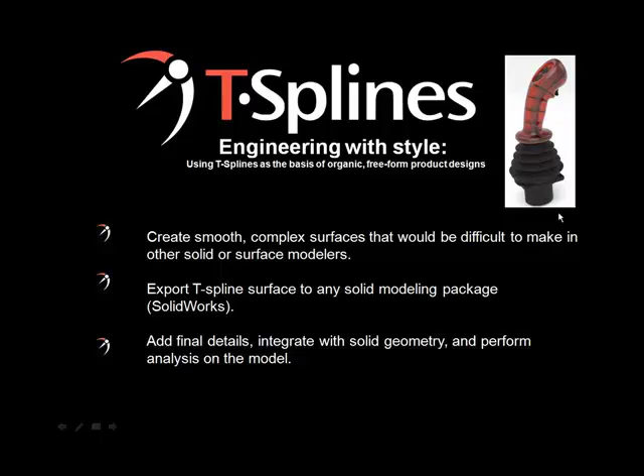Before we begin the demo, I'll review a brief overview PowerPoint of what T-Splines are and why they are useful in the design and engineering process. So T-Splines is a new surface and also a plugin for Rhino that allows you to create smooth organic designs, edit them quickly, and export them for manufacturing without remodeling.

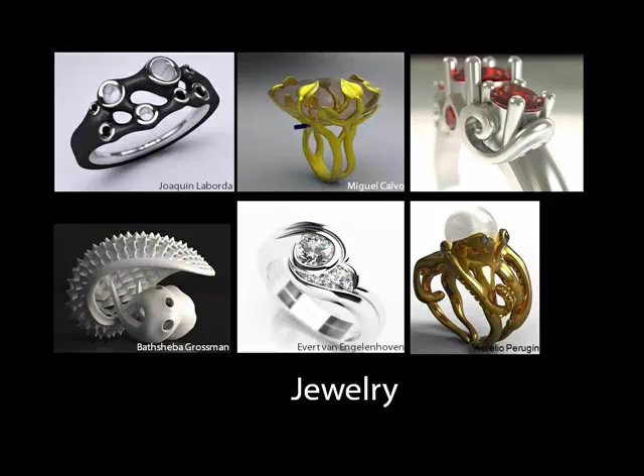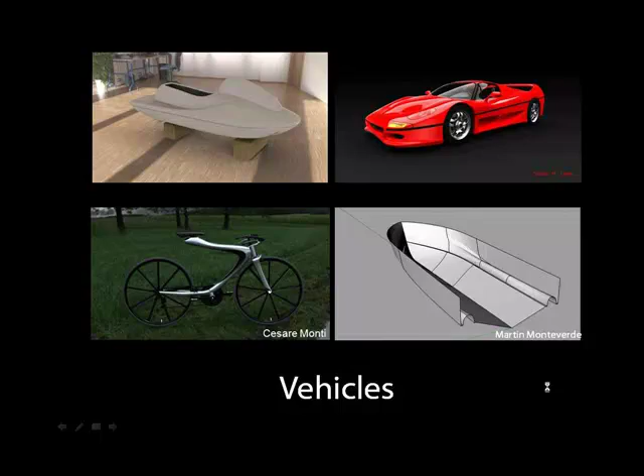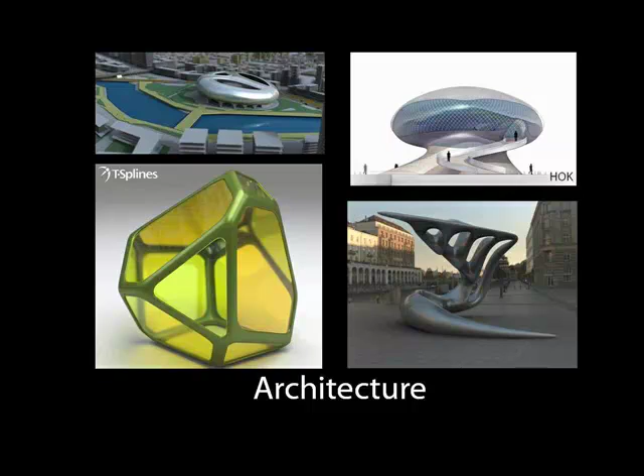Now, the reason why T-Splines was used for all these designs is because T-Splines offer some advantages to the technology currently used throughout CAD, which is called NURBS, or non-uniform rational B-splines. Just as a background, NURBS all have a rectangular topology. They're a smooth surface, but when you need to make a more complex shape out of NURBS, then you need to use a number of NURBS patches to comprise the model. That's possible, but it makes it difficult to have the patches all meet up in a watertight manner. And when you do get NURBS to be watertight, the models can be difficult to edit without losing smoothness, increasing model complexity, or even without gaps appearing.

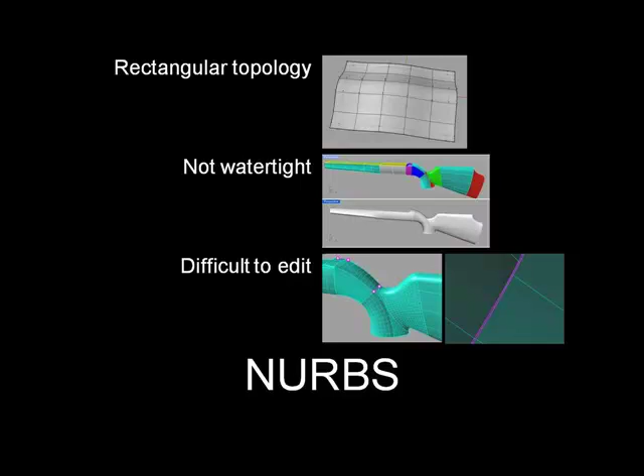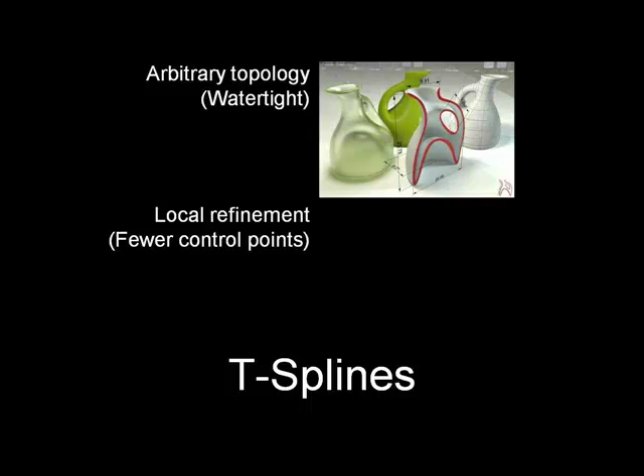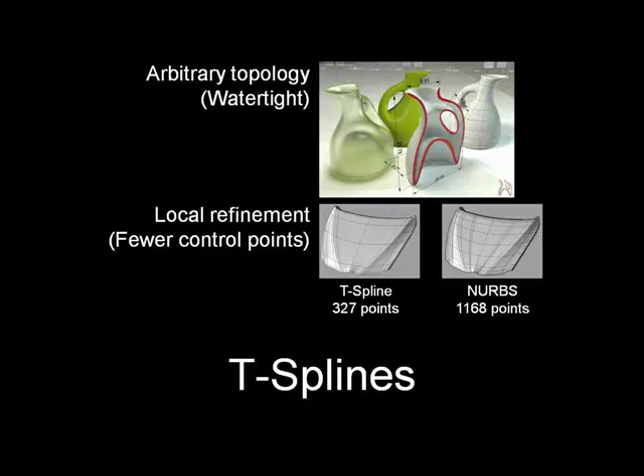So T-Splines are a new surface type that was invented to solve these shortcomings in NURBS. T-Splines are a smooth surface, they're compatible with NURBS, but they have 2 key differences. First, with T-Splines you can have arbitrary topology in your model and keep it watertight. What this means is that you can have voids, holes, Y branches in your model, and it can still be one single smooth editable surface. Second, with T-Splines, you can have local refinement in your model, which means you can have detail just where you need it without having the detail propagate across the whole model, which makes the model easier to control and also to fair.

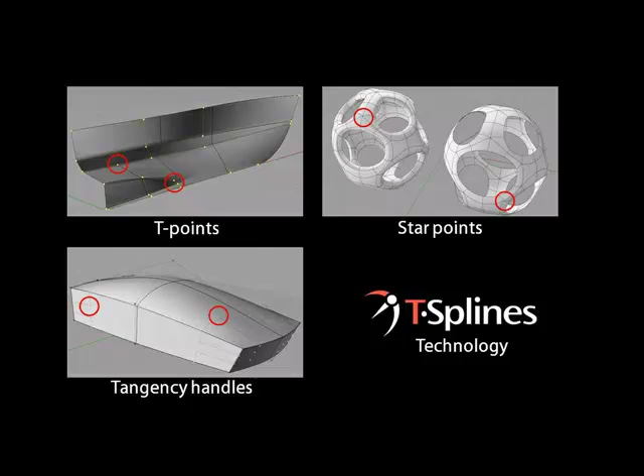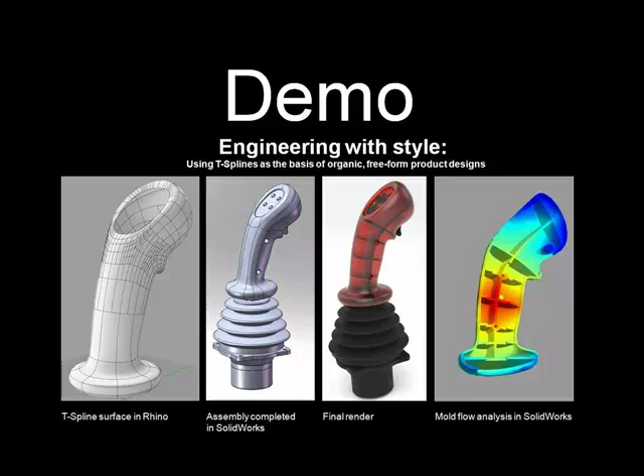So with that brief overview of what T-Splines are, let's step into the demo, which will comprise the rest of the webinar. During the demo, we will show how to create a T-Spline surface in Rhino for this joystick, then how to complete the assembly by adding additional details inside of SolidWorks. We will also show that this model can be subjected to any type of analysis done in SolidWorks, and it will hold up as a good surface.

So let's switch over to Rhino. Here you will see this is just a copy of Rhino 4, and the T-Splines plugin is these pink icons in the T-Splines toolbar. T-Splines is a fully integrated plugin inside of Rhino, and many Rhino commands can be used on T-Spline surfaces, and it's very well integrated.

During this demo, we'll show two ways that a T-Spline surface can be created to make both the base and the handle of this joystick. We'll also show how to merge T-Spline surfaces together and how to use T-Spline Symmetry to explore the shape of the model.

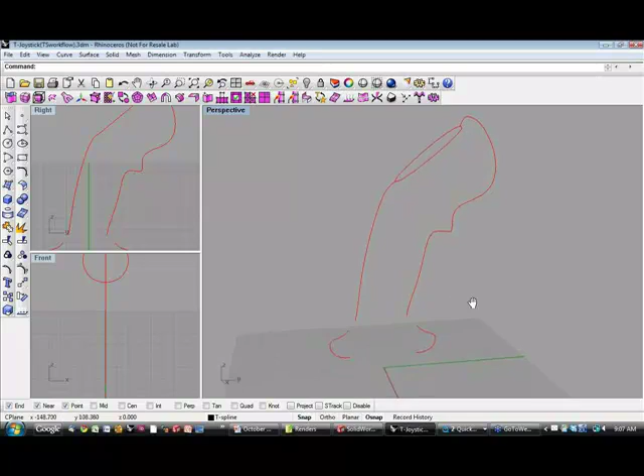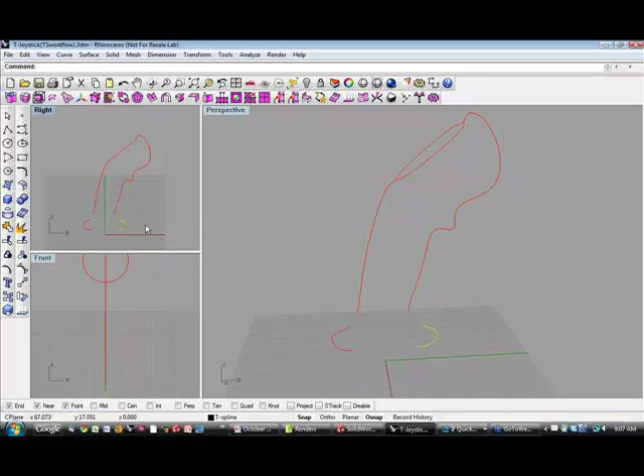So to create this joystick base, we'll just pick one of these curves and use the Rhino revolve command. We'll open the surface menu and click revolve, then revolve this around the origin. Let's look at snapping to that, and just step through the revolve command.

Now we've made a NURBS surface, and later we will convert this to a T-spline, but that's how we'll get the base of our joystick.

Now to create the top of this joystick, we're going to use a method called box modeling, which is a method you can use in T-splines. You start with a primitive, and then you push and pull on that primitive until it arrives at the shape of your design.

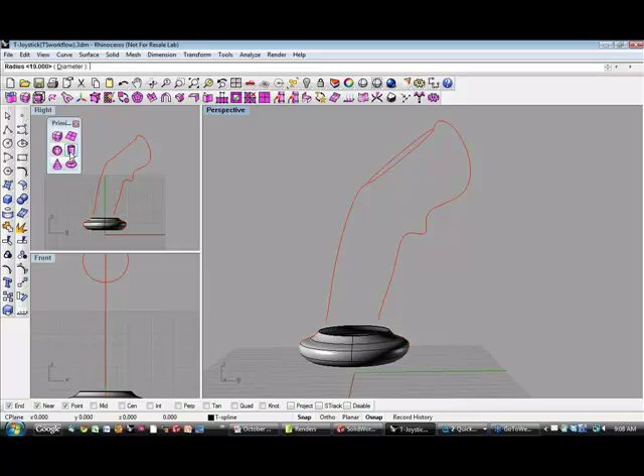So we have some T-splines primitives here, and we can just choose the primitive that most closely approximates our final shape. In this instance, I'll use a cylinder with a radius of 19, and I'll place the end of the cylinder here.

Then just move the cylinder up into position so that it lies where it should in the model.

So now we have the two basic components of our model created, and we just need to make a few more modifications before we continue on with our modeling.

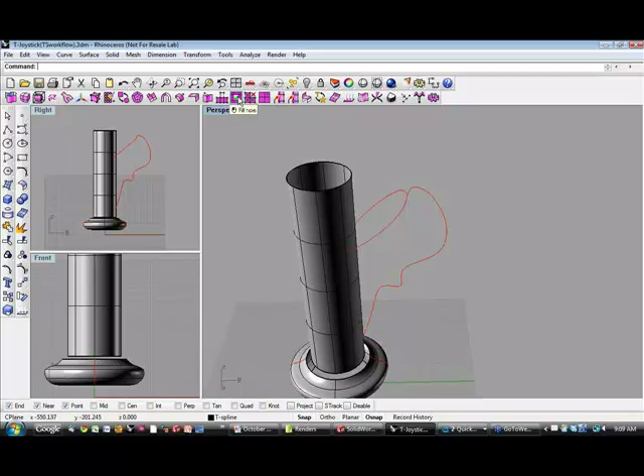First of all, the top of this joystick will be closed, and we have an open top to our cylinder. So what we need to do is fill that hole, and we can do that using the T-Splines fill hole command. Just select an edge of the cylinder, and it will close that hole.

You can see what this has done is created a smooth surface, but on the very top of this is an 8-sided face. T-Splines allows n-sided faces in the model.

However, if I zoom in on here, you can see that n-sided faces are not always the smoothest.

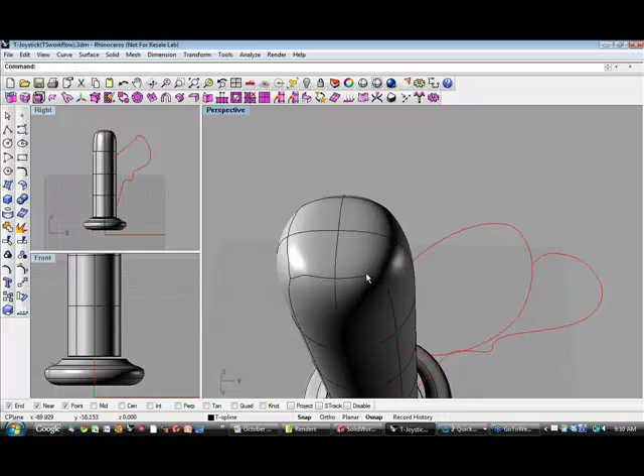So we'll go ahead and divide this into some 4-sided faces using the T-Splines insert point command. This is just adding edges to the model and dividing that 8-sided face into 4-sided faces, so that's cleaner geometry to work with.

You can see there's even some artifacts of the n-sided face there. To remove those, I'll use a command called the make uniform command, and that will relax the surface and make it smoother and easier to use as I'm modeling.

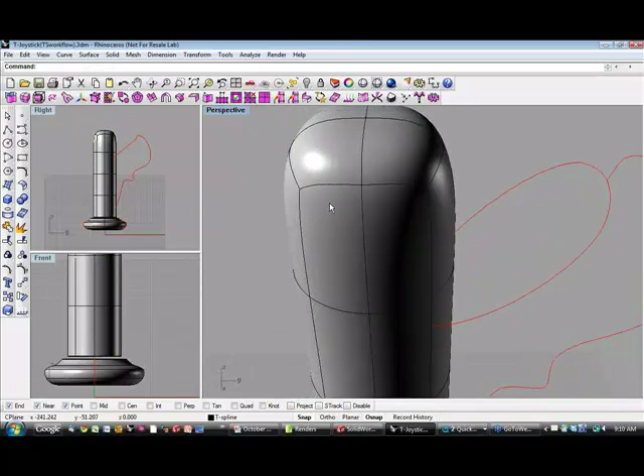So now we've gone ahead and capped off the top of our cylinder and made it nice and smooth. Now we'll go ahead and merge the T-spline surface to the NURBS surface.

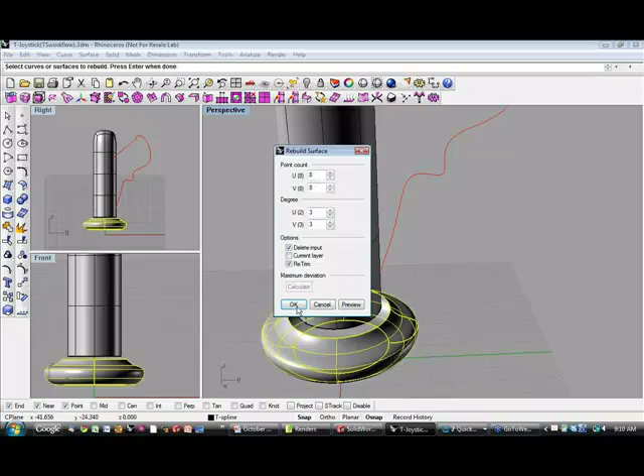To perform the merge, first we need to convert the NURBS to T-splines. Before we do that, I'll rebuild this NURBS surface to make sure that it's degree 3 by 3, and I'll also make sure the point count stays 8 by 8 so that the isoparms line up with the T-spline surface. It's not necessary to have the isoparms line up together, but it does create a cleaner model.

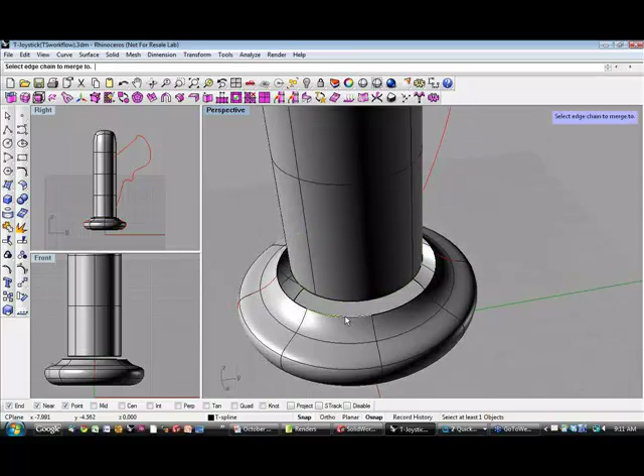Now I'll use the TSplines merge command and merge from the T-Spline cylinder to the base. You can see that's created a nice smooth surface there, so now this is a single T-Spline surface.

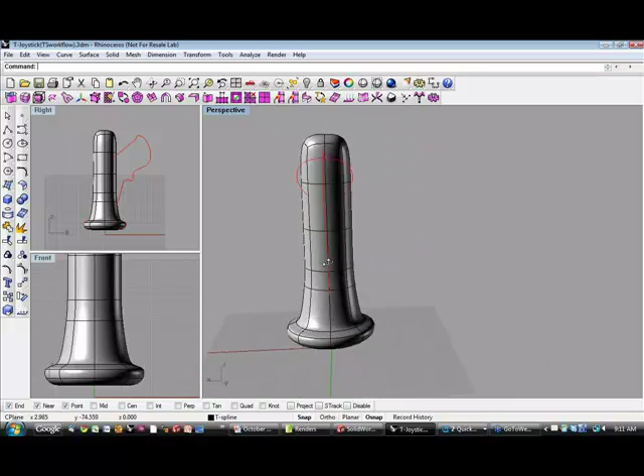The final thing I'll do before we start moving control points to get the shape of the joystick is take advantage of the T-Spline symmetry. Since our joystick will be symmetric, I'll select half of the T-Splines model. I'll enter T-Splines edit mode, turn on face mode, select the T-Spline faces on the side of the model, and just hit the delete key, which will delete half of the T-Splines model.

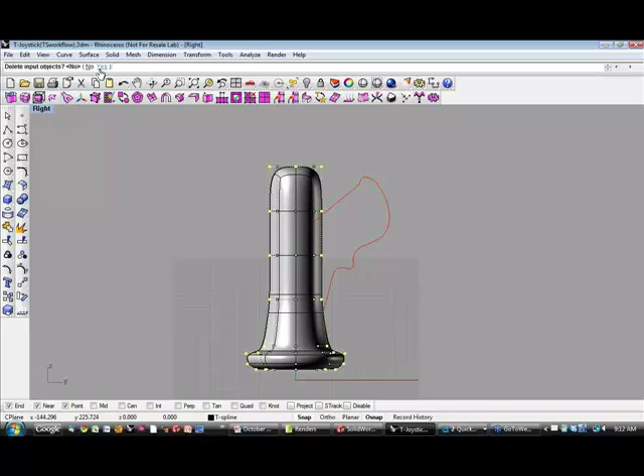To apply symmetry, I need to make sure all my control points lie along the center plane. First I'll use a Rhino command to project all those points to the C-plane. Now that they're lying along there, I can use the T-Splines symmetry command to apply symmetry to the model. We can apply it in various directions, even radial symmetry. In this instance we'll just do X symmetry, apply that, and this green line means I now have symmetry in my model.

So when I select a control point on one side of that line, you can see it will update on the other side.

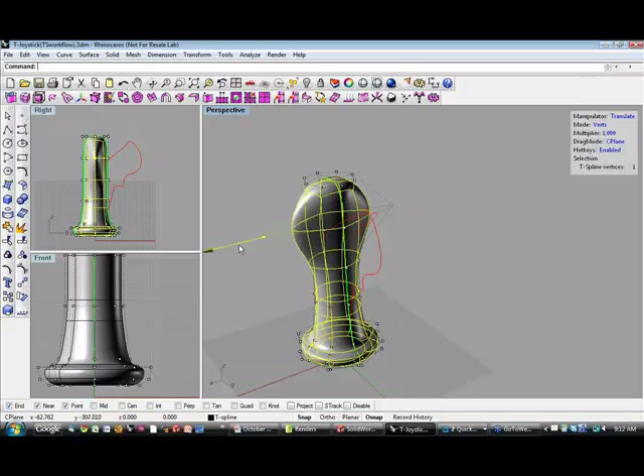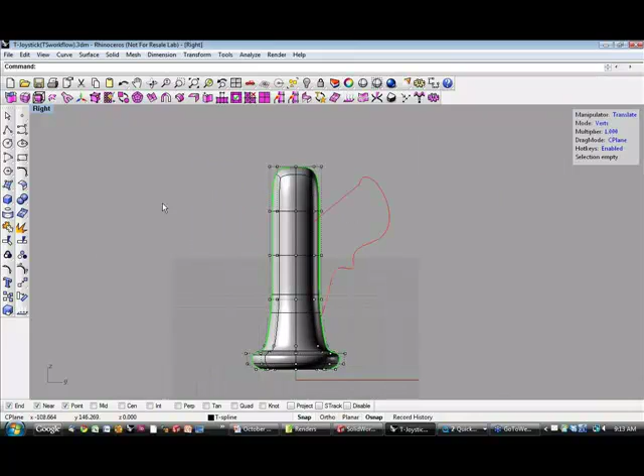Now that we have this basic T-Splines form, we'll move the control points to get the curvature of our joystick. Let's go to the right view, and first let me turn on my layers and lock the reference curves so I won't be selecting them. I'll also go to the wireframe viewport and use the T-Splines manipulator to move the control points.

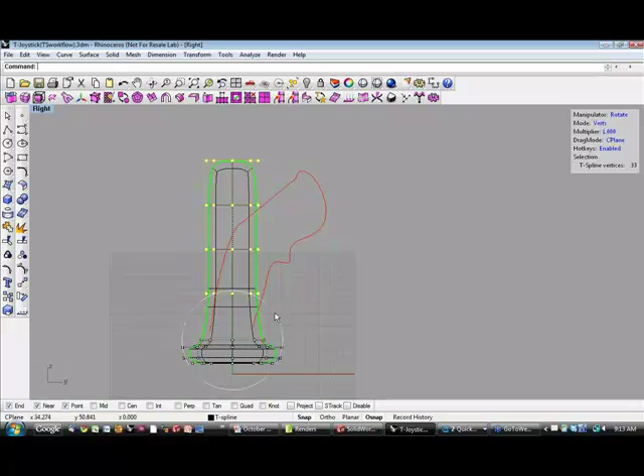Here we have the translate manipulator I've been using. I'll switch that to the rotate manipulator, press a hotkey to set the pivot point down at the base of the model, and just rotate all the control points. I'll deselect this row, again change the pivot point down here, and continue this process to get some basic bend.

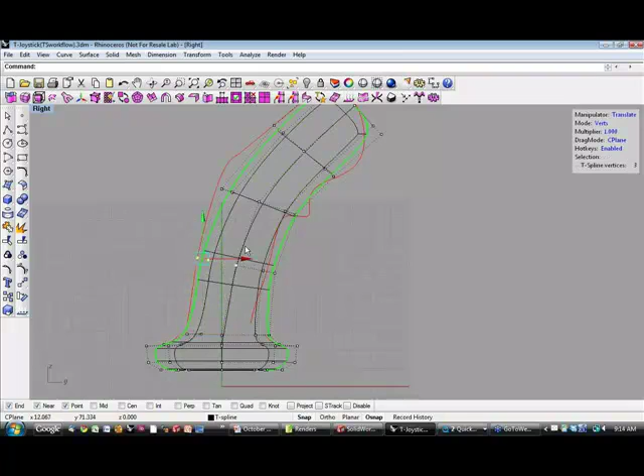Now that I have this model basically bent, I'll come in and move the control points some more to more closely match our reference curves. This is the key principle of box modeling: use a very small number of control points, but move them so that they can match a reference image or reference curves in the back of the scene.

So I'm just moving these control points around, and this is looking a little bit better now.

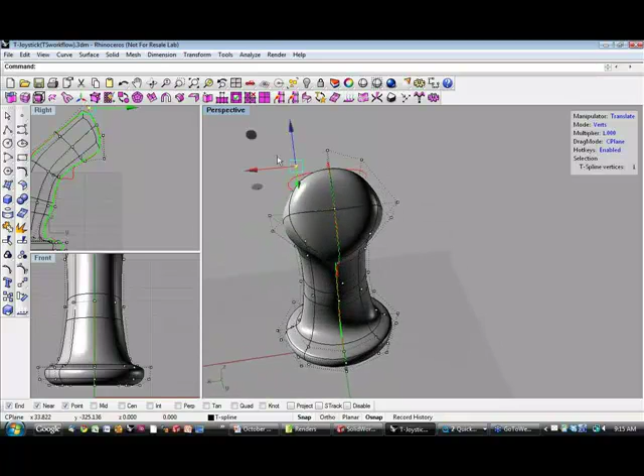Let me go into the perspective viewport. I've just been working in the orthogonal right viewport, but here in the perspective viewport I can also move some control points in these other directions. This box modeling gives you a nice flexible model that you can use for your form finding. So I'll move these control points around and see how that's looking.

One part of the model, right here for the trigger, will be difficult to have the surface flow through with the number of control points we have. So we have a couple options. First, we could add a lot of control points and then pull them out, but that gives us a needlessly high number, and then it will be difficult to smooth the model afterwards.

The second thing we can do is actually add some more faces by constructing them and putting them into the T-Spline surface. So that's what we'll do.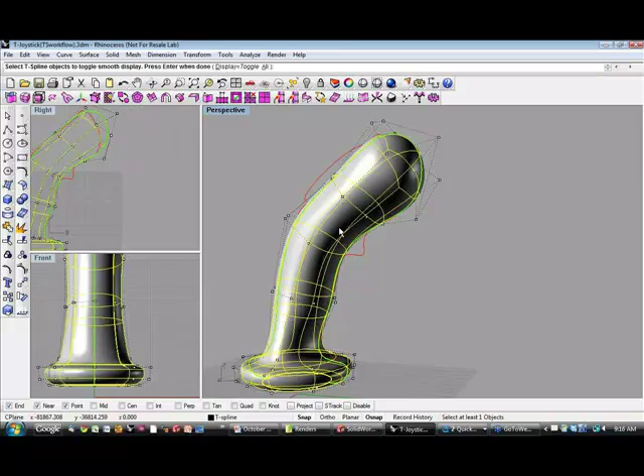Anytime I'm adding and deleting faces from the T-spline, I like to switch modes. This is what we call the smooth T-splines mode. We also have a mode we call box mode. You can click the smooth toggle icon and select the T-spline surface, and you can see how it's now represented as a boxy mesh. It's still the same model, and the control points are in the same locations between the smooth surface and the boxy mesh. This just gives me an easier way of understanding the topology of my model and where all the faces and edges are located.

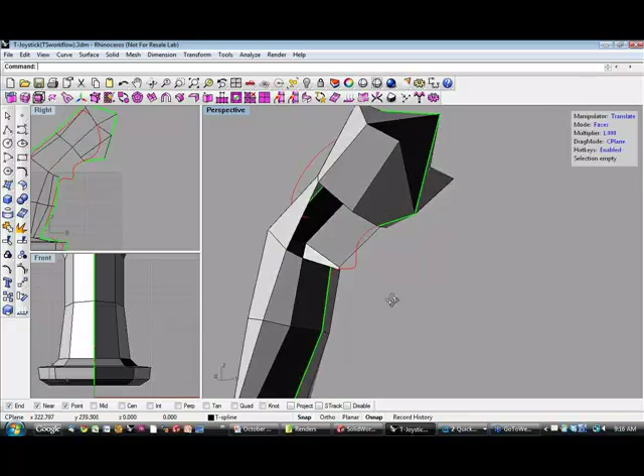So what I'll do to add some geometry here is first delete some faces. I'll go to face mode, select those faces, and just hit delete. You can see since I have symmetry on, it's deleted on both sides of the symmetry line.

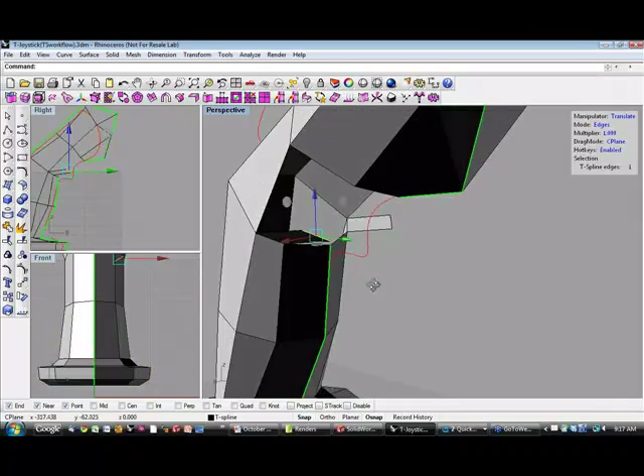Now I'll go to edge mode, select an edge here, and extrude that edge using the extrude command. You can see that adds geometry to my surface—it's added that face I've extruded. So I'll go to vertex mode and move these vertices around so that they come into the position where I want them.

And then I can go ahead and go to edge mode and extrude this edge again. Go to the extrude icon. You can see that it's being extruded since I have symmetry turned on. It's being extruded on the other side as well.

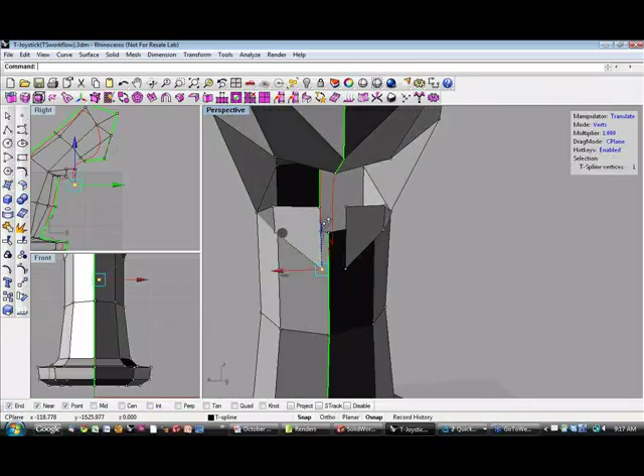Let's see, vertex mode, and pull this down to make the trigger a little bit bigger. Now I'll use the T-Splines weld command to weld these points together. Symmetry is still on. I've welded that together, so now I've added some geometry here, but I still have these gaping holes.

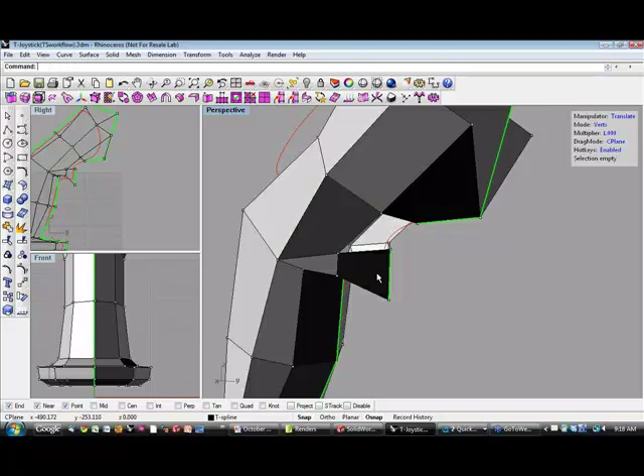We used the fill hole command before to fill in the surface, and I can use that here as well. Another command we have to fill holes is the append face command, so I'll use that this time. To use it, you just click on the corners of where you want the new face appended, then hit enter. So we'll do that again, clicking on corners of where you want the face to be. This gives you a little bit more control than the fill hole command as far as what your face looks like.

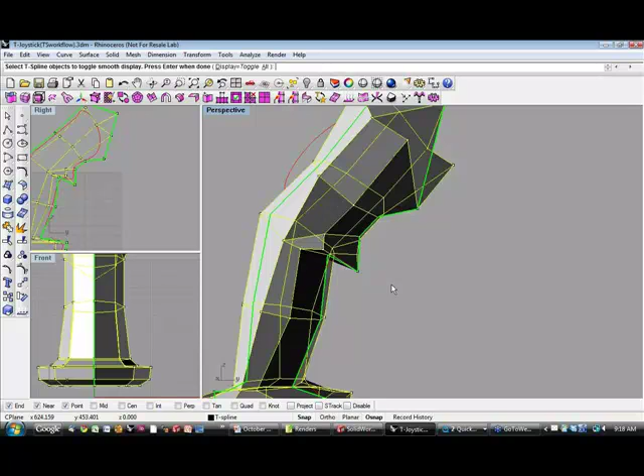Now that we've filled those in, I'll hit smooth toggle again and we'll see what the smooth surface looks like. Let me see if I can change that view a little better. We now have this star point here, and another star point here, which means we have some non-rectangular surfaces, which is nice because this is kind of a non-rectangular area here with the trigger.

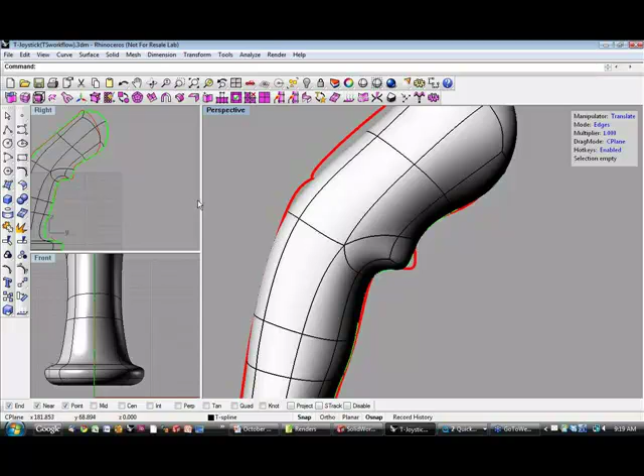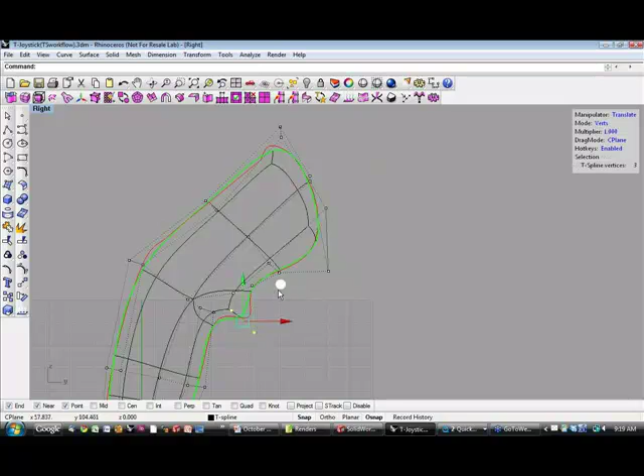I'll go back in my right viewport, turn on my vertices, and reposition the surface. It looks like I pulled this up higher, so I can bring that back down, and just reposition our surface so that it's matching what we had laid out with our sketch curves.

So now we have a trigger area. Let me turn back to shaded for our model.

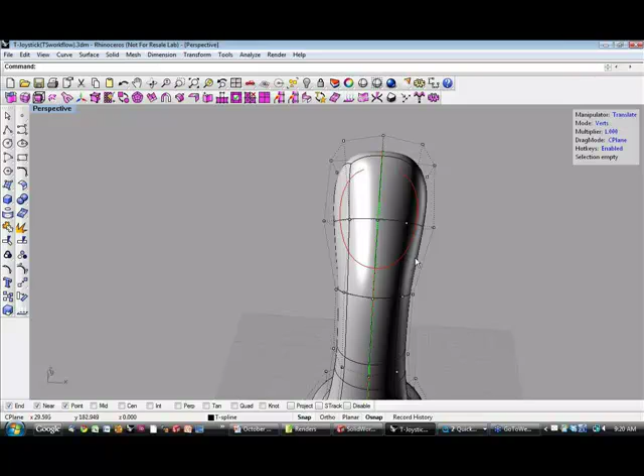We will add two more parts of detail before we bring this model into SolidWorks. First, we need a hole here in our model because this is where the plate will go on for the joystick. If you want a hole in T-Splines, you have two options. First, you can trim the T-Splines model using the Rhino trim command, and it will turn into a NURBS, but you'll get an exact trim. That's often a good approach, but then your model is no longer a T-Spline.

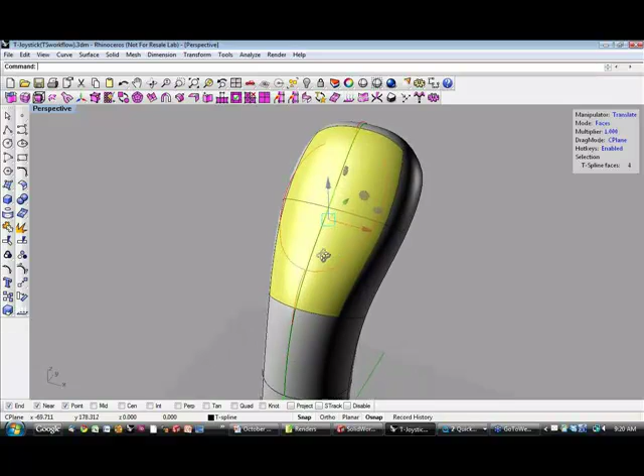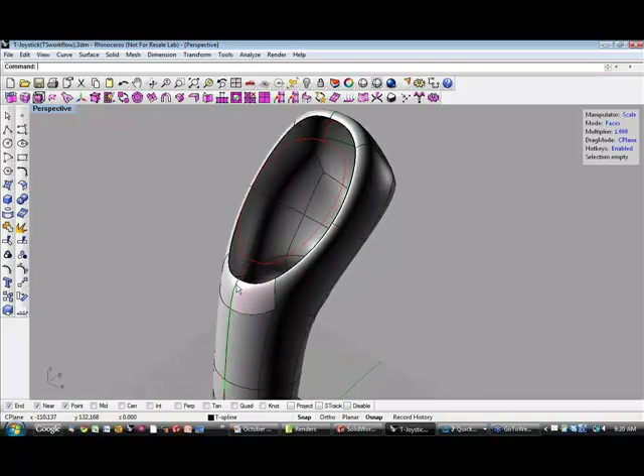The second thing you can do is just delete T-Splines faces, so that's what we'll do here. I'll go to face mode and select these faces. Before I delete them, I'll extrude the faces, just like we extruded edges before. This gives us additional faces in the model, and I'll scale them inwards to add a nicer ring to the edge of the deletion. Now I'll hit delete, so now we have a hole there in the T-Splines model. Again, the extrusion gave me a nice ring around the edge of that hole.

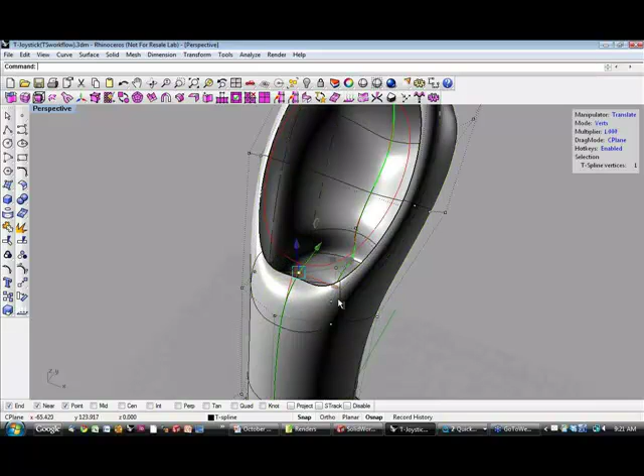Now I want to match the T-Spline surface as close as possible to this curve which I've laid out. We have a command in T-Splines to do that, called the match command, and it can match the edge of a T-Spline surface to any curve or NURBS surface edge. Before that match, I'm just going to pull the surface a little bit closer so that the match is less ambiguous how it should take place. Okay, so that's looking a little bit better.

At this point also, I'm going to turn on my layers and move ahead to another layer that I had prepared previously, because when we move this model into SolidWorks, I want to make sure that the different features are working in SolidWorks. But this is basically the same model that we've been working on today. And now with this edge close to that curve, I'll go ahead and use the T-Splines match surface command.

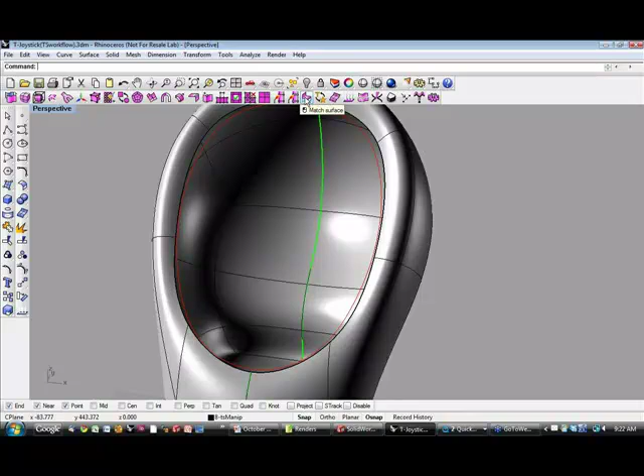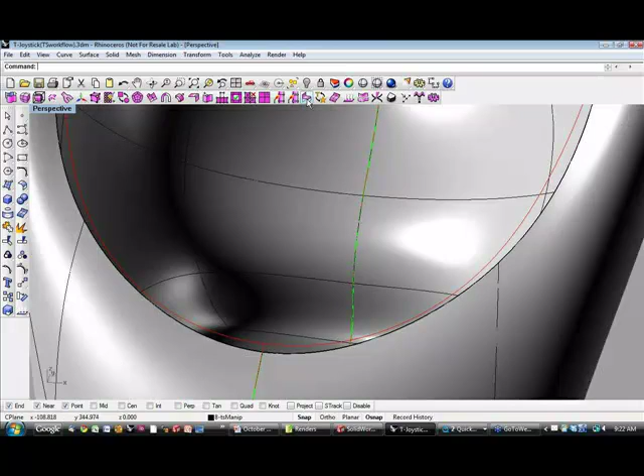So I can just double-click to select this T-Splines border edge, and then I'll select the edge that I want it to match to. And it looks like, actually, I better turn my layers back on and unlock those curves so I can select this curve. And then it looks like I better run the match command again. It gives me a little dot here, and I need to click opposite that dot on the curve so that it knows where the seam of the match should be.

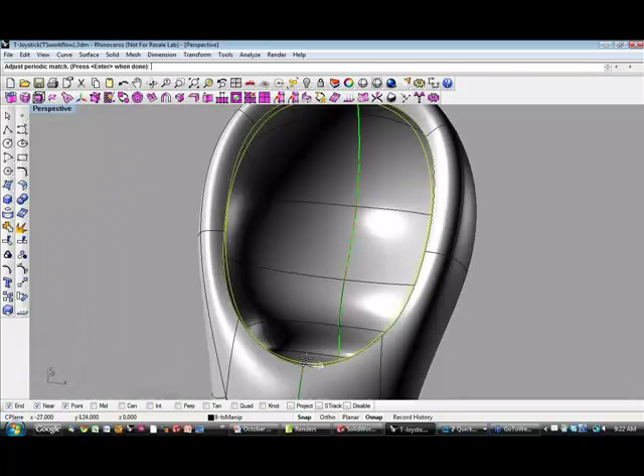And I can just move this seam so that it's in a good location, so that there won't be too much twisting. And then I'll just go ahead and hit enter. And I have an option to refine. If I do refine the surface, then it will add more control points, but it will get the T-spline to within file tolerance of that curve. So it will really match that curve nicely. The match command will disable symmetry.

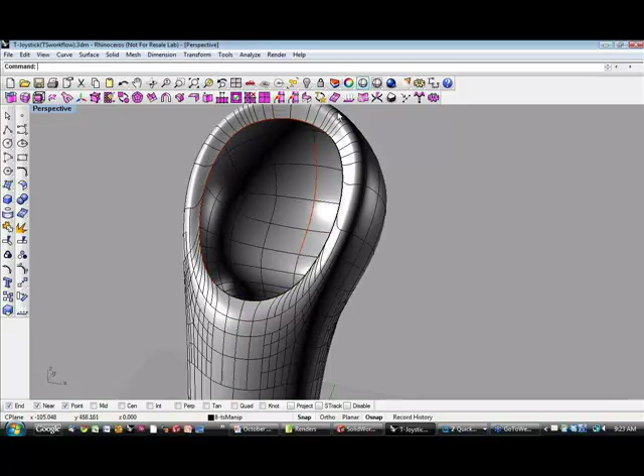But you can see now how closely that T-spline is matching that curve. It's within your file tolerance. So you can see it's added some more detail in order to do that match. But the nice thing with T-splines is that detail can be localized. And so down here on my model, I don't have any more detail needed because the detail will just be T'd off here.

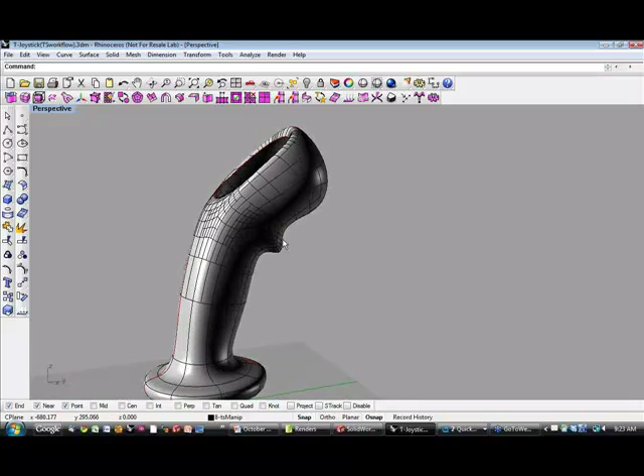The final feature that we'll add is a local T-splines crease. T-splines have the ability to have creases that only go partway through the model. So I've just selected this edge loop, and I'll deselect some of those edges. And then I'll just use the T-splines crease command. This will give me a perfectly sharp crease in my model. So we can zoom in and see how that's giving me a perfectly sharp crease.

The tangency of this crease can be controlled by these special T-splines tangency handles. You can tell that they're colored white. They're a different color than the other control points. And I can select those control points. I'll change my manipulator drag mode to UVN, so I can drag those perpendicular to the surface and change the tangency of the surface around those tangency handles.

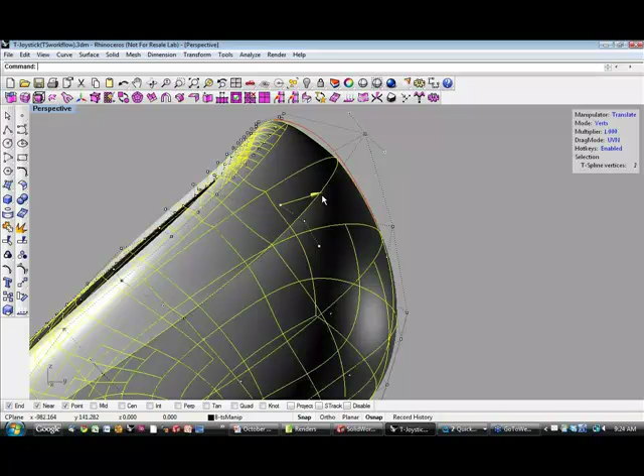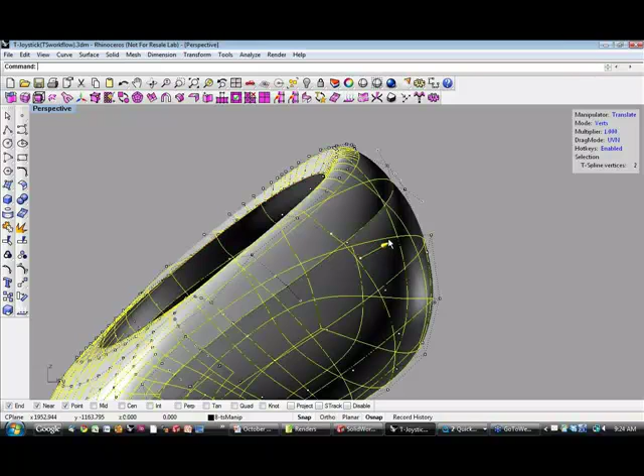So you can see before, the surface kind of peaked at the crease. Now the crease is kind of going into the surface. I'll do that on a few more of these. Let's see, make sure I have those selected. And I can just go around my surface and adjust the crease so that it's coming in with the tangency desired.

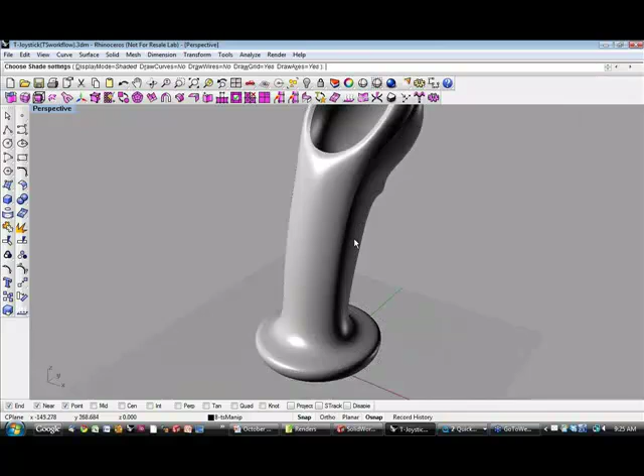Okay, so this is basically the model that I'm ready to bring to SolidWorks. And because SolidWorks does not have T-splines natively today, what I'll need to do is convert this to NURBS. But converting T-splines to NURBS is just a push-button operation. You can see here's the T-spline surface, and to convert it to NURBS, I'll just click that icon and click the T-spline. And you can see the actual shape of the surface doesn't change.

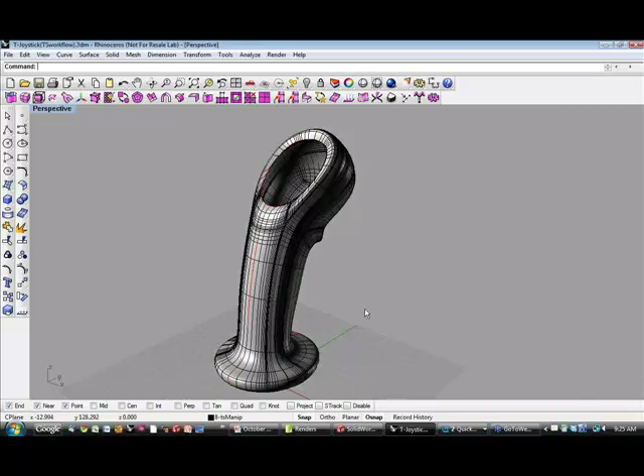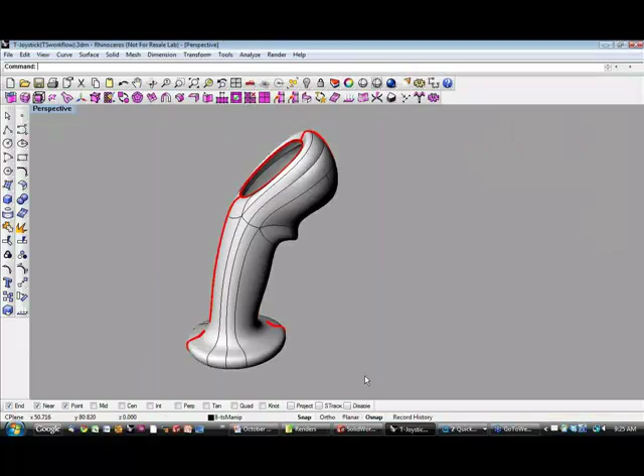What does change is that the T-spline needs to be split up into rectangular NURBS regions, because NURBS all have to be rectangular, but the actual smoothness of the shape will not change at all. So now to bring this into SolidWorks, I will just save this as a Rhino 3DM file, and then go into SolidWorks. And because SolidWorks does open Rhino 3DM files, I can just open up that Rhino file here in SolidWorks.

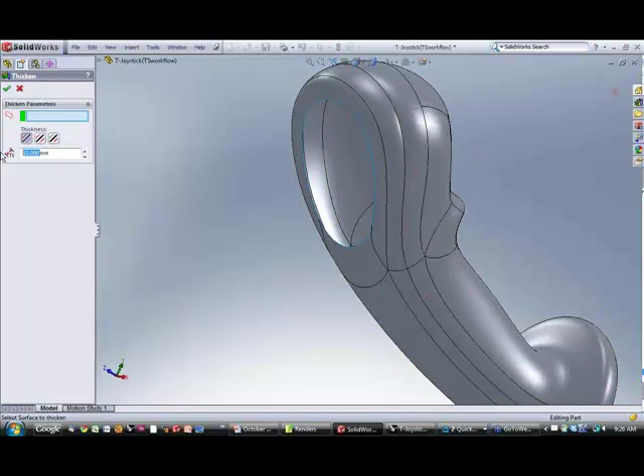And click on the T-Splines, click on that joystick. I'll go ahead and run import diagnostics, and there's a face to heal. Go ahead and heal that. The gaps, of course, are desired in the model. So we'll go ahead and finish import diagnostics. And this T-Spline surface is as good as any watertight NURBS surface brought into SolidWorks. So you can see it's just a surface now, but we can thicken the surface, maybe to 2 millimeters.

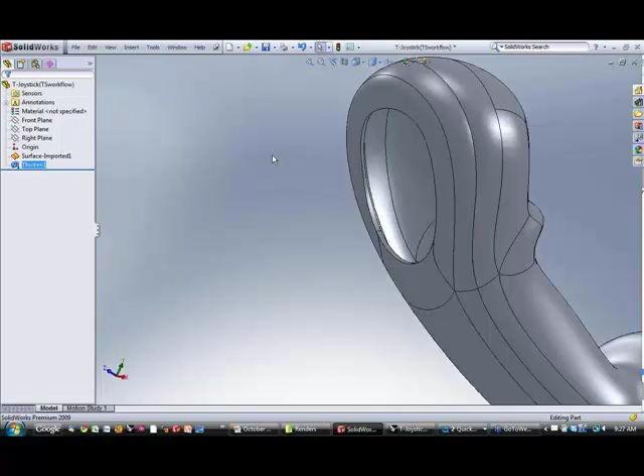And turn this into a solid. So you can see now this is a solid, and then we can perform any other operation in SolidWorks on the model. So I've gone ahead and saved these ahead of time. But so here we're at the point where we've created a solid.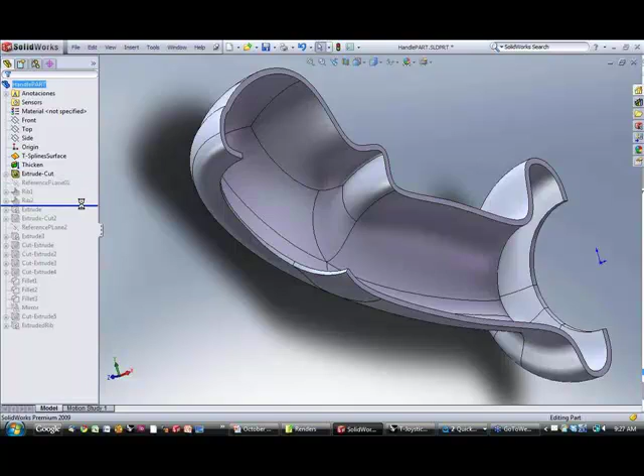I'll just kind of step through the feature tree just to illustrate how this works just like any other geometry in SolidWorks. We can cut away at the model. We can add some ribs, perform some extrusions, some additional extrusions, add some fillets to the model.

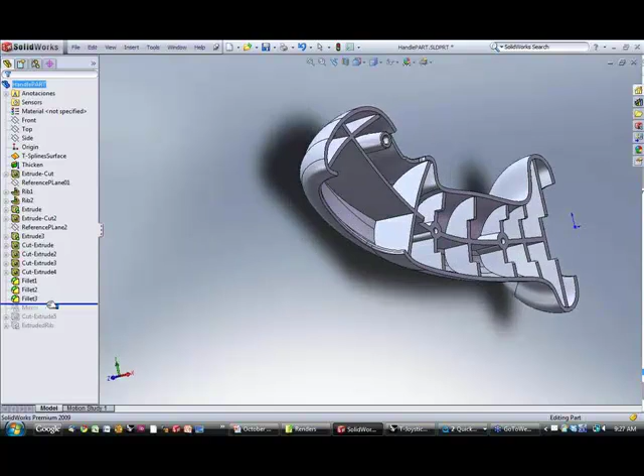Let me rotate just to kind of show how those fillets are being applied over here on the opposite side. And just treat it like any other geometry inside SolidWorks. So now we have that nice organic T-Splines base of our SolidWorks model. And of course we can create a larger assembly with this as the basis. And again, here's our T-Splines piece inside the larger SolidWorks assembly.

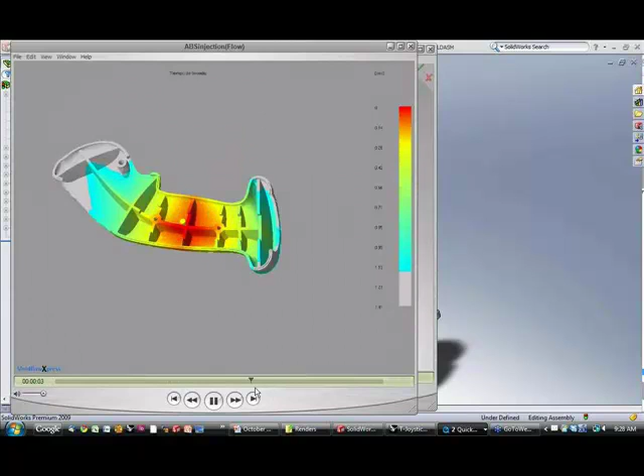The T-Spline surface can be subjected to analysis just like any other SolidWorks model. So here's some analysis showing the flow of how the injection would take place. You can see this is a nice, healthy surface. Let's run that again.

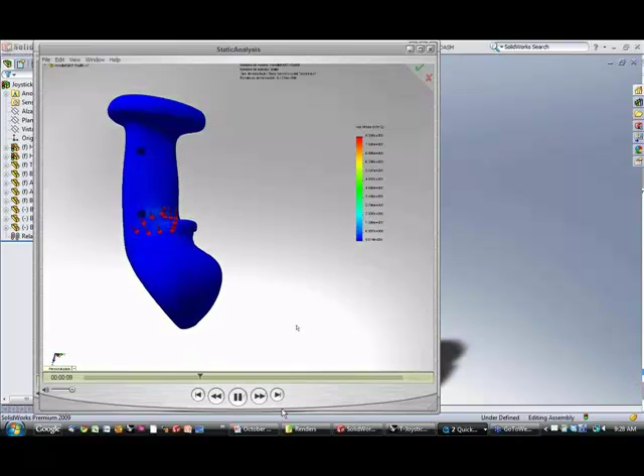And then also we can just observe the different analysis of what happens when different pressures are applied to the T-Spline surface, and you can see that the surface behaves well in this type of analysis as well. So that's kind of the purpose of this webinar, is just to show that T-Spline surfaces are compatible with NURBS and can be brought into any solid modeler and used in a design for engineering and manufacturing.

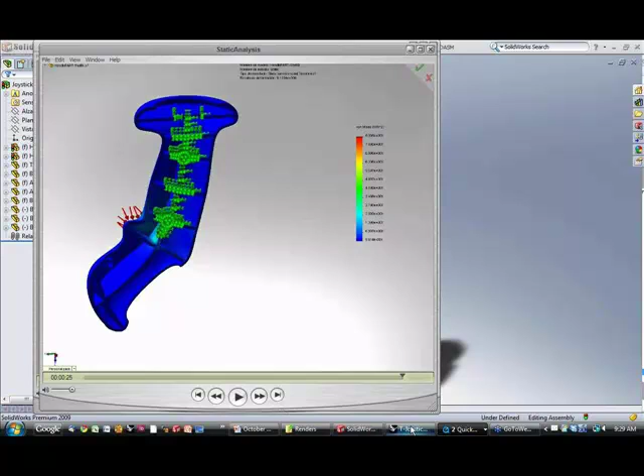So one question that might be asked is, once we have the T-Spline model inside SolidWorks, what if we want to make a change on the actual T-Spline surface? Well, that's easy. We can just go back to Rhino, and let's undo some steps. So we go back to the T-Spline model, and let me go back to shaded mode.

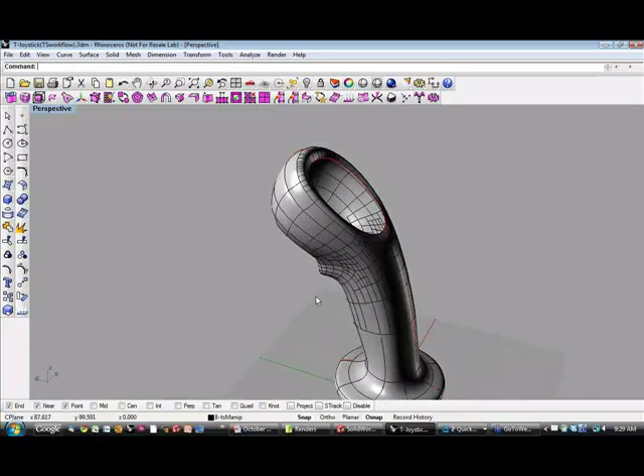So for instance, maybe I want to remove the crease in the T-Spline surface. So to do that, I'll just use the remove crease command, just by right-clicking on the crease icon. And I'll just select the whole model, so all the creases in the model will be removed. So you can see that's nice and smooth now. And maybe I want to explore the design of my T-Spline surface as well.

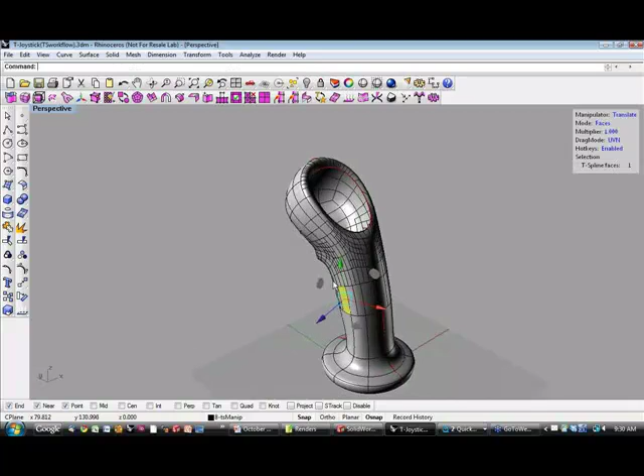So maybe I'll just turn on the faces, and maybe I want to drag out one of these faces to add a different feature here in the joystick. Well, when I make these changes, I can just bring this T-Spline back into SolidWorks. So I'll go ahead and hit Save As and save it as the joystick again.

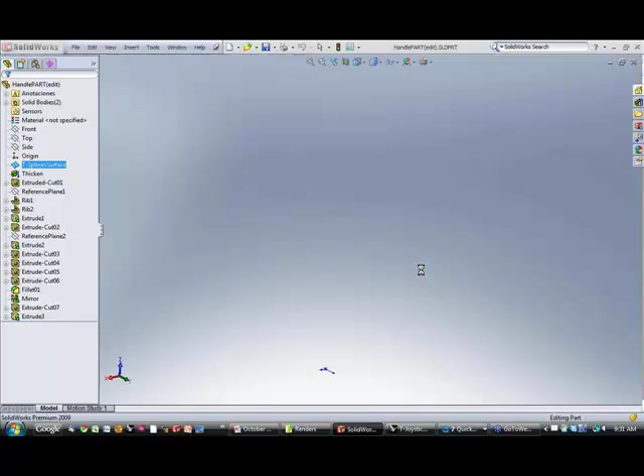And then back here in SolidWorks, we'll just go back to our T-Spline model. And here at this step in the feature tree where we've imported the T-Spline surface, I can just go ahead and edit this feature and load in the new T-Splines file. Now this will take a few seconds as it's kind of recomputing that and trying to rebuild the feature tree.

And there's a good chance that depending on the extent of the changes I've made, maybe some of the features will not be able to be rebuilt automatically. But it will be possible to kind of make changes on that feature tree and see how the model looks with this new T-Splines geometry. So let's see how this is looking.

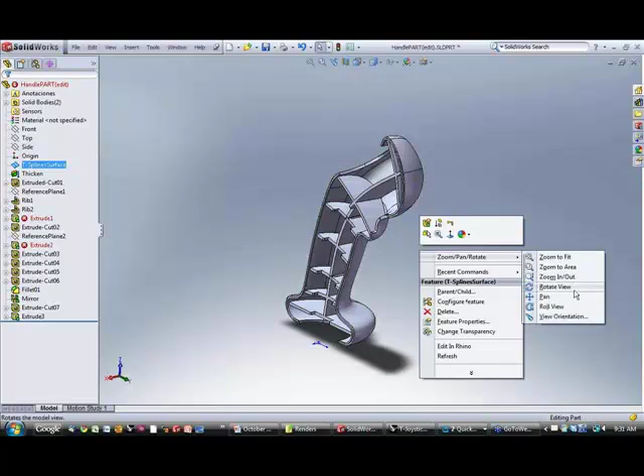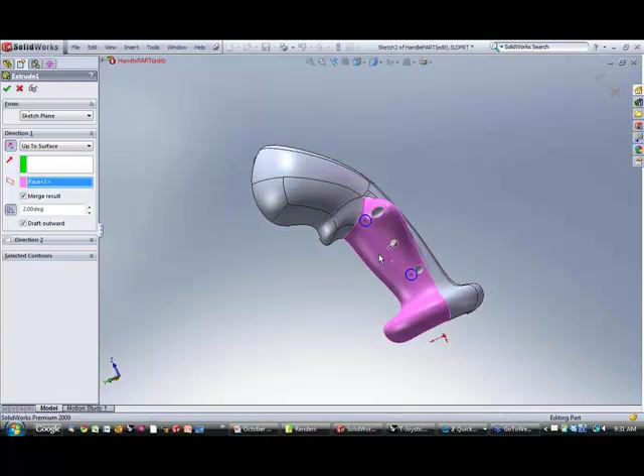It looks like these features are no longer working, so we'll need to edit those features and identify where in the new geometry the features should correspond to, and that will let those features be redone. And we'll go ahead and do that again with this one. Edit this feature, and looks like we need to identify that it will come up against this face.

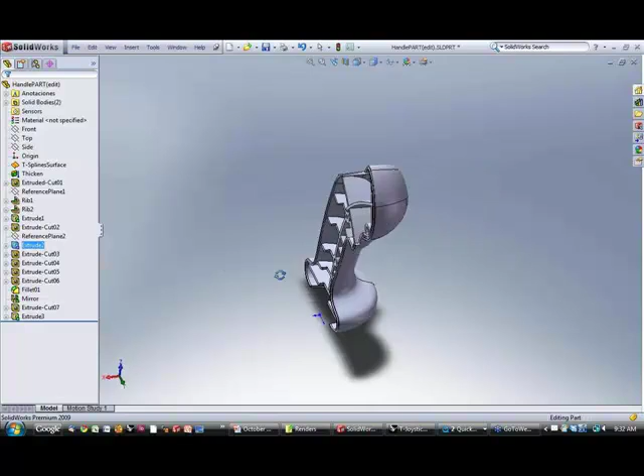And so now we've been able to bring that T-Spline model back into SolidWorks and make sure the features are working so that we can check out how this design will work for us as well. So that's the webinar that we have prepared for you today.